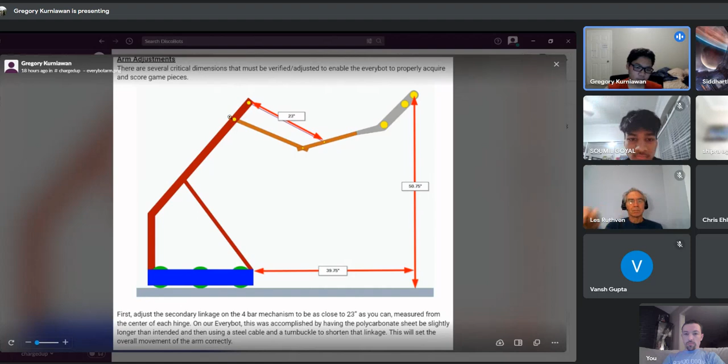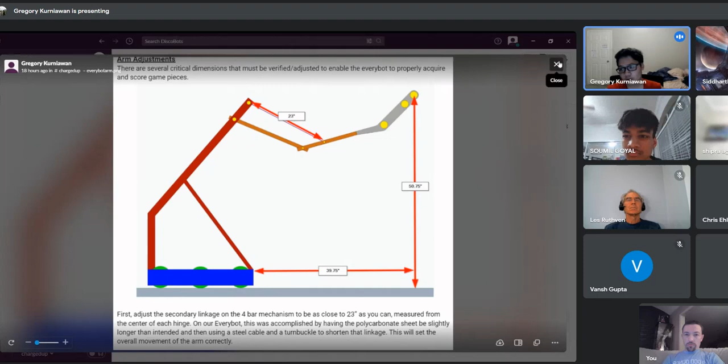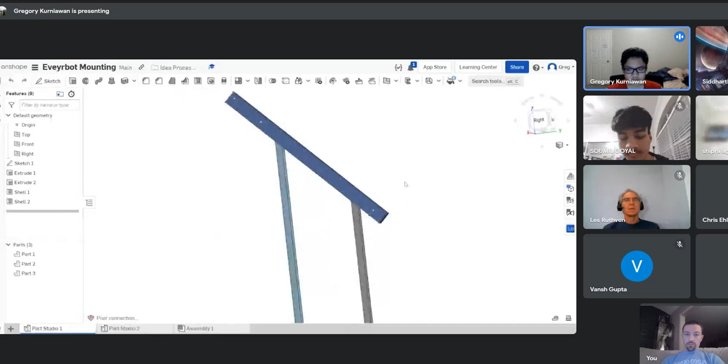I've made a concept by myself. So mine is we have two 1x1s, and then this 2x1 here, and the idea is, because of the lack of availability for the 120-degree gussets, I've tried to use the 135-degree gussets. Hopefully those are in stock.

Yeah, some of the things I noticed about the EveryBot was because of the top hinge, they need a shaft at the back, and a chain running to the main hinge, and because of that, that increases a lot of weight and a bit of complexity.

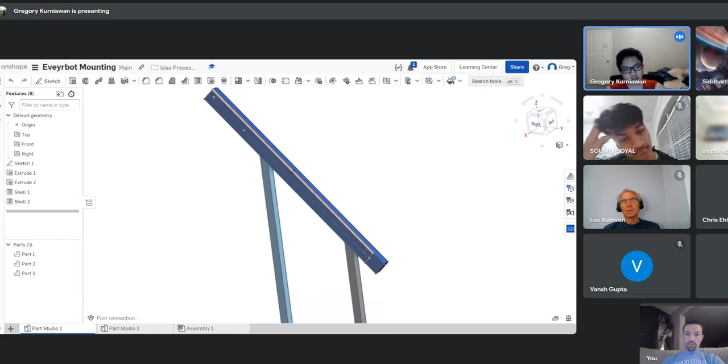So next step I'm going to try is to move this top hinge down, and see how that will affect some of the movements of the arm. And if I can do that, we can make a shaft here, and hopefully it'll be a lot simpler.

Yeah, in terms of 120-degree gussets, I think we do have some, and we ordered some. But if we really get in a bind, we can always make gussets, so keep that in mind.

We have the ability to do certain gussets, and I know you guys already have some custom gussets that you are projecting in the CAD. Those can be machined, it's just we got to make sure they work correctly and not waste time making really complex gussets if we don't have to. So anyway, that's just an aside. Anything else you want to talk about on this?

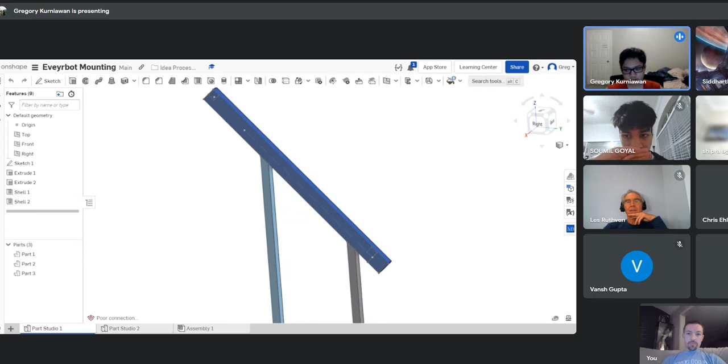Oh yeah, we'll be building the main structure of the main arm and intake piece for the Everybot arm at Westside in the coming weeks.

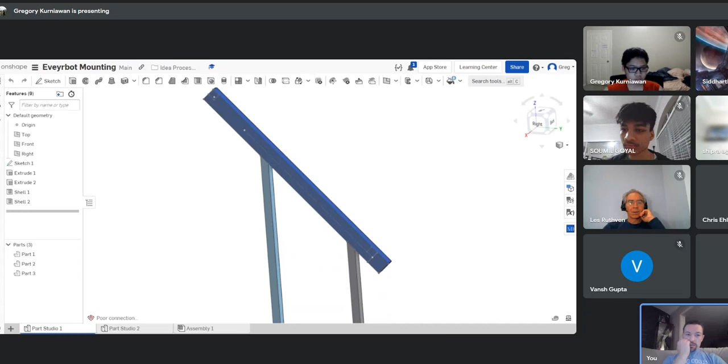Yeah, I have questions about the diagram that Sid threw up, and I think maybe you guys are working together on it. But this mounting scheme, I guess it's the one on Slack. If you want to just pull the one up in the CAD channel. I have the CAD pulled up. I can share that. Okay, let's just jump straight to that because I think this is very related, and it'd be helpful for everyone to understand it.

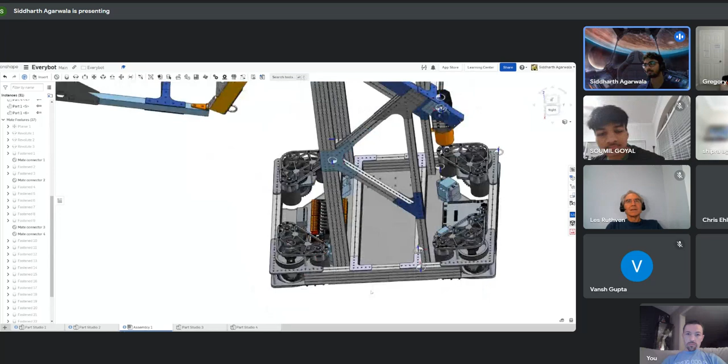So this was just like an expansion on Greg's one by one idea. I noticed that we had some more space on one side of the frame so that we could use a 2x1, which I thought, although it is a bit heavier by quite a bit actually, we could add more stability to the structure.

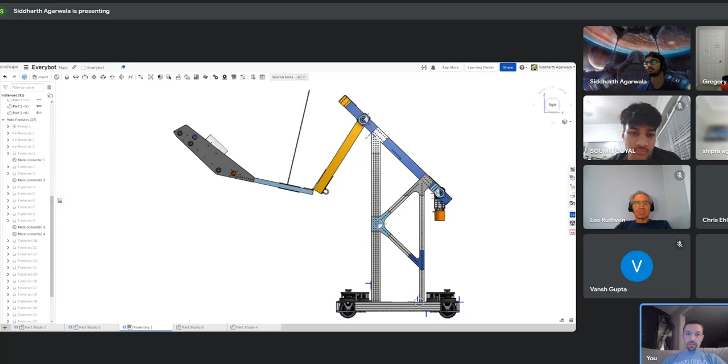If we go to the old Everybot, I believe they used the 2x1 also in their original design. It's just when they're using the 2x1, they use the 2x1 on the short side instead of the long side. So that's probably where it's looking like it's bigger. Yeah, there's just more 2x1.

Okay. All of the main dimensions should be almost the same. Like the pivot should be at basically the same height, but we just flipped the use of the 2x1 and the 1x1. Okay, and I see you've added...

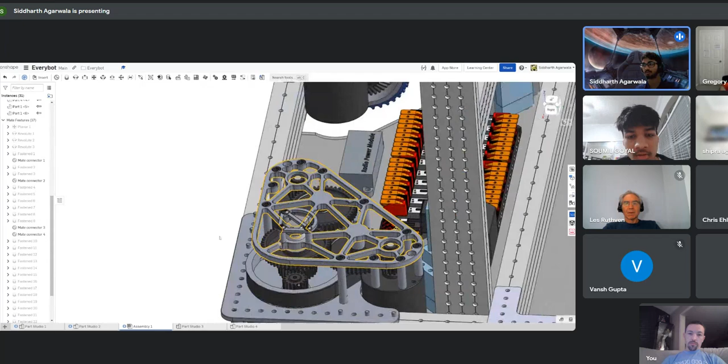So what's the benefit of this way over the original A-shaped design? Well, the original A-shaped design would require the arm to essentially clip into the swerve modules, and if you look at the Kitbot chassis, you have space where the swerve modules are on here.

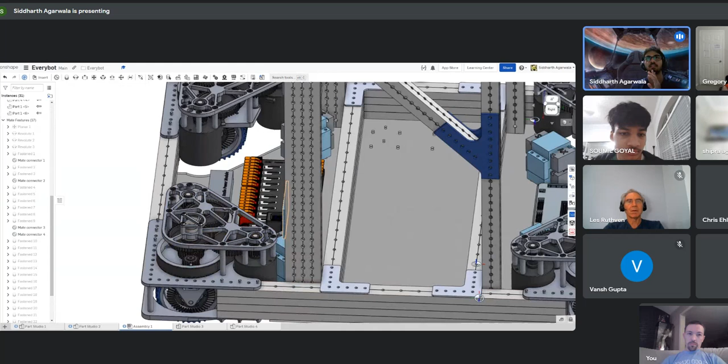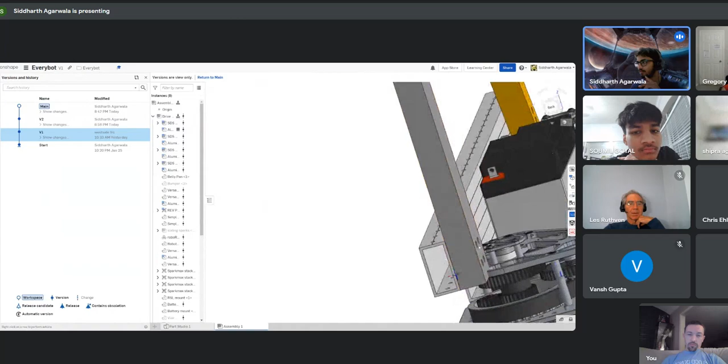Essentially, the problem was that it would require us to put stacked 2x1s. So I think I actually have a version with that in it. Yeah, here. So if we hide the bumper, you can see that they were like stacked 2x1s, and the 2x1 and the 1x1 were getting really, really close to the swerve module, like to the point where there was some clipping even.

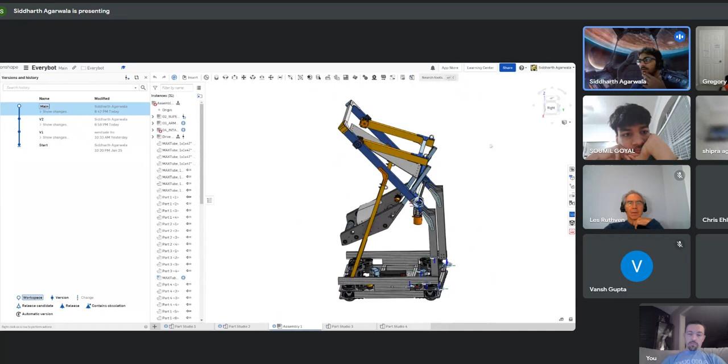And I mean, it's a strong superstructure. It could be optimized because we definitely have space to mess around with, like in the belly pan, which is when we come back to this. If you give it a second, it'll load up. Yeah, I see it now.

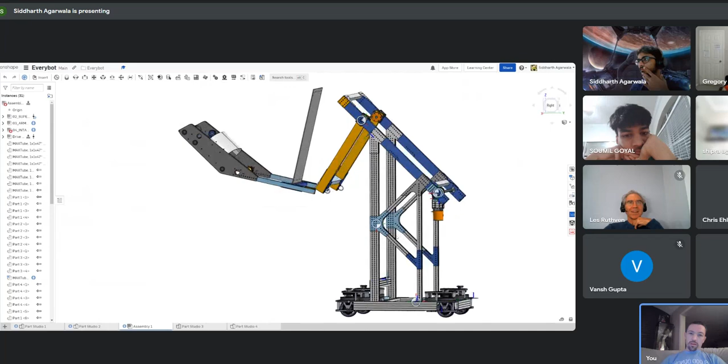So you swap the 1x1, the yellow 1x1, for a 2x1 that's going straight up. Okay, I get it. But you added some extra bracing here too, it looks like. Oh yeah, that's just to make sure it doesn't wobble, and I thought it looked nice.

It does look pretty solid with the triangles and stuff. Yeah, and just so everyone's aware, I don't know if people see it, but there's some custom gussets in there, which will take some machining.

It would be nice to think about how to minimize custom gussets if you're kind of designing your own webbing. So you probably could look at some of the Vex Pro angle gussets that we might already have that fit the right angles, since you get to kind of play with the angle. It just saves us a little bit of time of machining stuff. We could like laser cut them in something and then use them as templates too. So if we need to, just put a wood template.

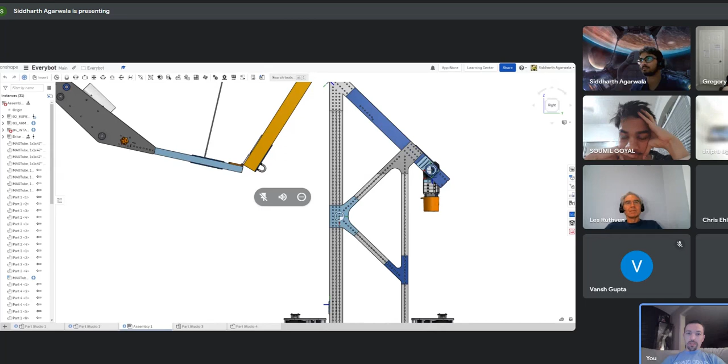Yeah, there's lots of ways we can make it. Just think about how to minimize the effort if necessary. Some of it is just not going to be possible because there's different angles that won't even match with what we can buy. I will say that all of these are at 45-degree angles together.

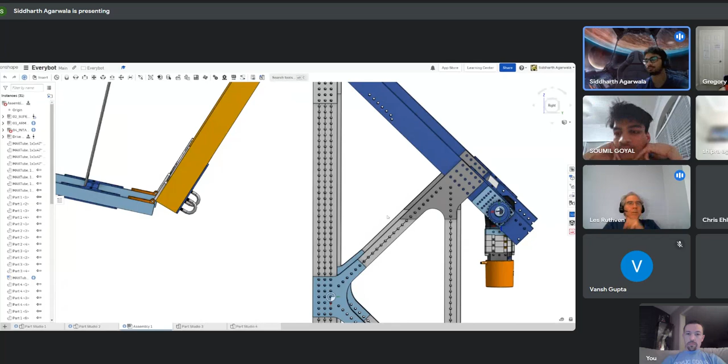Also, the gussets, I designed this for use with like Rev Spark tube, like Max Tube, just because it already has the holes drilled in the sides compared to VersaTube where you'd have to go and drill every hole. So that's the reasoning behind this. And then also this hole pattern on the gussets should coincide with Max Tube.

This last one I have to fix, but all of these gussets line up perfectly with the Max Tube hole pattern, which seems pretty solid.

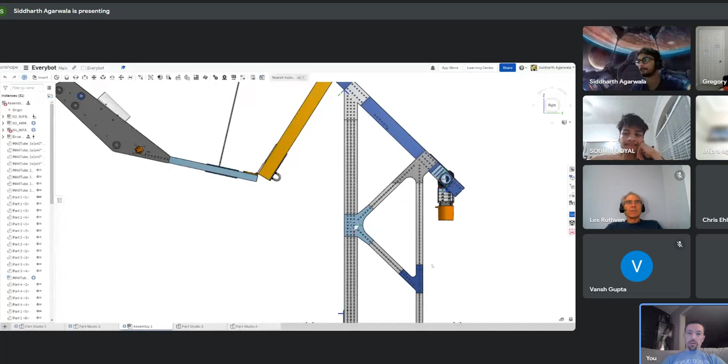In the rev order that I made, I have to check the dimensions, but I think they only had like 40 something inches available. I don't know if that's going to fit what we have here. I think 48 is the rev, they don't sell this 59. These are 42-inch ones, 59 inches or whatever. Yeah, 59 is Vex, but 48 is rev. So that's 42 right there. So we're good.

I'll check it. Yeah, I wouldn't get too hung up on the details right now. We can always massage those final designs.

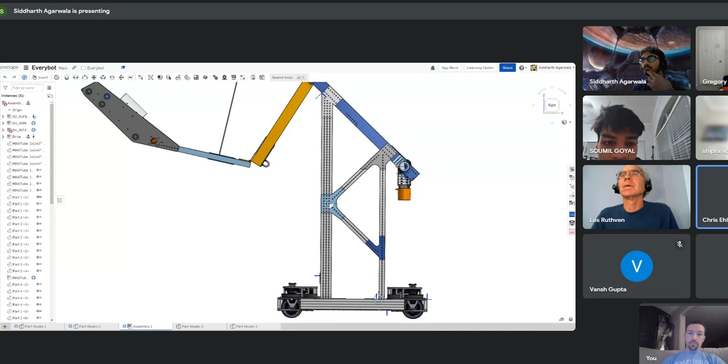The key thing I want to emphasize though is we got to make sure that geometry matches up with the EveryBot design. In particular, what I'm talking about is that blue beam that you've got at an angle right now. You have your pivot point locations. We need to make sure those match up with EveryBot, because if we start changing that geometry, it may not operate and function the same way that they've obviously already demonstrated.

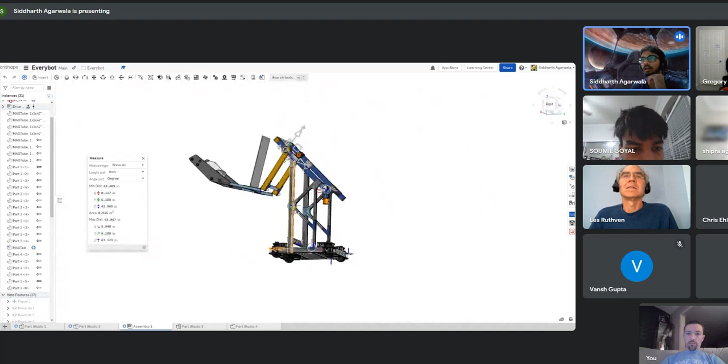The next thing I'd like to see is start throwing together Soumil's intake plates in here and try to get closer to most of the CAD roughly all together so we can see how it all looks.

That's the project for this week, I guess. Yeah, we always want to get as close as we can to a mostly complete CAD, so when we see conflicts, if we need to change something before we start cutting too much stuff, it would save us a lot of time.

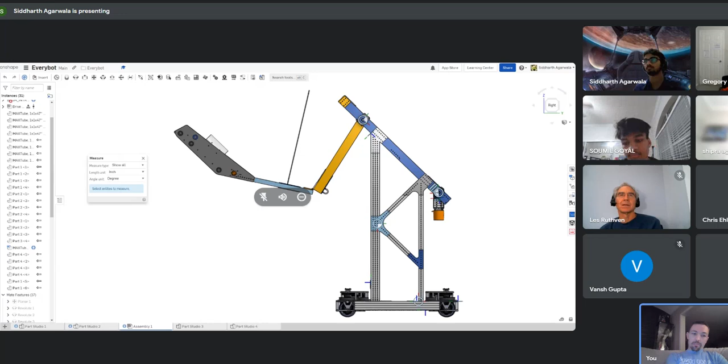Gregory can get hung up a little bit on the details of this mounting scheme to verify everything, and maybe you can move on to just making sure the whole CAD is going all the way. Sure thing.

So, Soumil, are you ready? Yes, sir, I'm ready. Let me know if it's shown. Can you see the fusion?

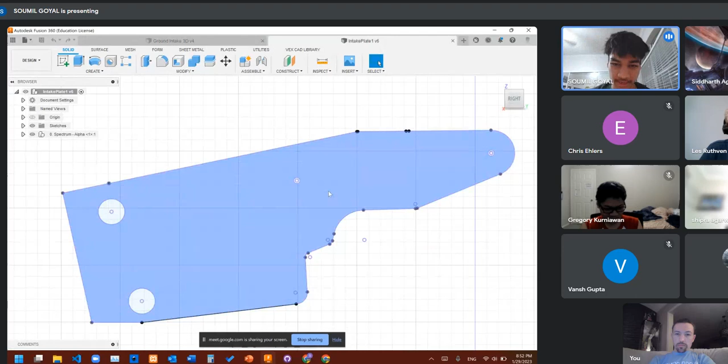Yes, excellent. I'll be brief here. Last meeting I presented some intake data from other teams and our own testing. Now this Saturday, we were able to simplify with further research into this type of plate that we laser cut. The main benefit over the last one is it's only like 2 holes, so it was easier to test with and prototype. If you're wondering how it will intake, basically between the 2 holes in this area is where the tip of the cone will go. So even if the cone is sideways, which we tested, if you run into it with the plate, eventually it will catch the tip of it, and the cone will always end up facing so that the tip of the cone is inside and the flange, the part of the square, is directly perpendicular outside.

And if you're wondering how it will take in the cube, no, it does not fit in the front. It will go in from the bottom.

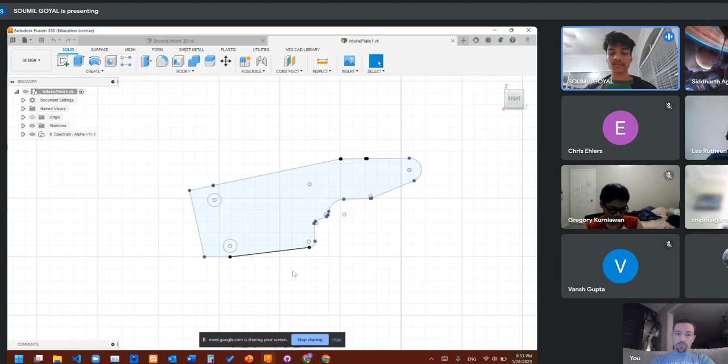So for some background of this design, it was heavily inspired by Team Spectrum's design. What they've done with this prototype is that, as I said, they take in the cones from the front, but the cubes, it actually goes underneath. So it uses the bumper as a wall, and then it uses this bottommost roller to assist with pushing the cube up, which is what I was able to test on the dummy swerve.

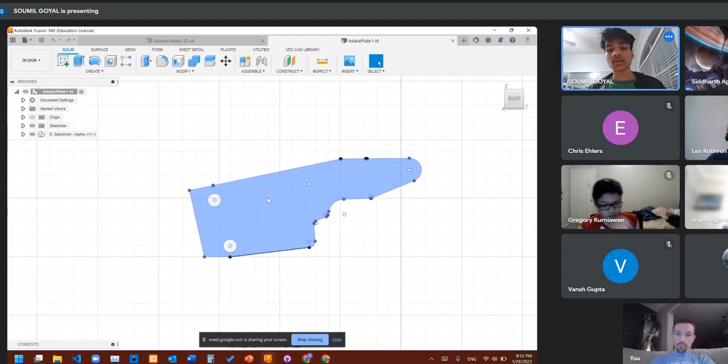And it did work. Now there's a few rooms for improvement. Firstly, of course, cone intaking can always be more efficient, but it's already pretty good right now. The main thing is about the cubes. What happens is that when you intake it, it kind of stays at the bumper level. And if it was ever a 4-bar linkage and you tried to retract it, it would actually drop the cube. But since it's a prototype, it will be easy to fix. One of the things might be just adding a 3rd roller somewhere in the middle so it can continue pushing that cube up.

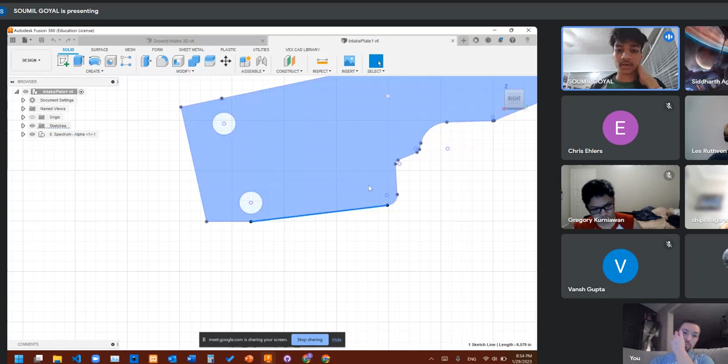Because currently it just gets stuck at the first roller since there's no other boost going to it. This curve represents the radius of the bumper, and that's how the linkage comes down. It starts inside the robot first. At position 1, it's all the way in within the frame perimeter. Position 2, it's only a little bit out and the bumper touches this curve so it can intake the cube. Position 3, it's all the way on the floor—this line is exactly rubbing on the floor right now, and that's how it intakes the cones.

Hopefully the next steps will be putting more geometry in the correct position so we can get the cubes fully up. My ideal thing would be that we don't actually need 3 different positions, and we can always intake cubes and cones regardless, in the same place. That's most of the updates for the ground intake.

But it did work very well. I know I made it sound a bit disappointing, but I think it was good results. I have a question.

After your position 2, when it hits the bumper, how will it go further down to the ground? Wouldn't position 2 be the final position?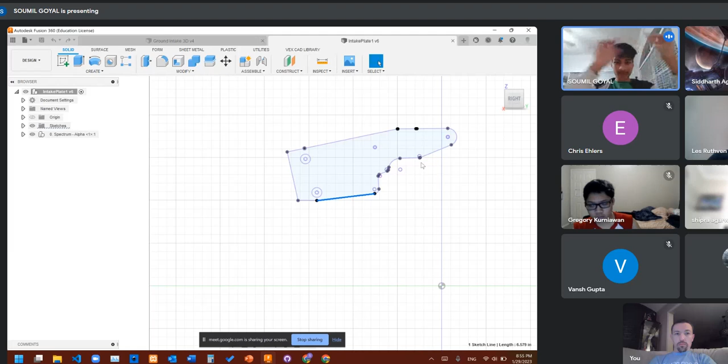Yeah, so the 4-bar linkage isn't parallel moving. If you imagine this is the intake as shown, right here on this hole there's one bar going down, and right here there's another one. This bar going down is much longer, so it actually moves in kind of an arc. As it goes on the bumper with this curve, as that bar keeps moving, it actually pushes the intake more out. That's also one of the rooms for improvement.

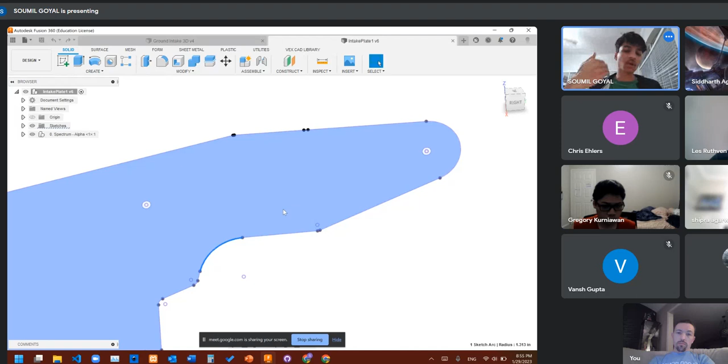Glad that you mentioned that. Also, one of the rooms for improvement is trying to get it as compact in the robot as possible, because currently, since this moves out in an arc shape, it sticks out quite far if it was on a real robot.

Eventually we need to take some of those prototype videos and share them so everybody can watch them over and over again and see how things are going. We don't have great videos yet of things picking up cubes, but I think we can get some more this week and really study it to make sure the prototype is working the way we expect.

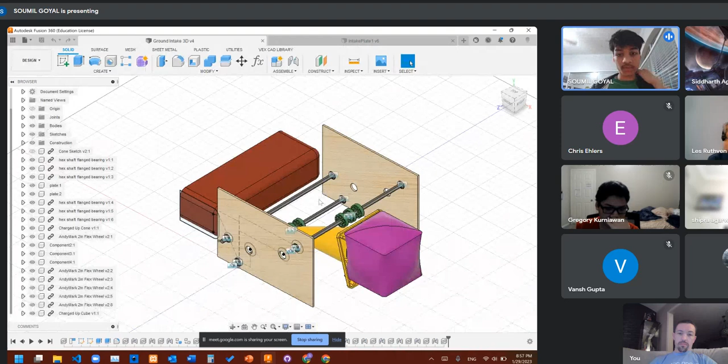I think they just had a smaller rod on the bottom, but kept the bigger wheel on top. Looking at their more recent videos, it's likely we might be able to make this, just have the cube go straight in between the two wheels. You might be pretty close, maybe half an inch off. But according to their CAD, the gap between just these two centers is 3 to 4 inches, and a cube is 9 inches wide. So it's definitely a different CAD they're using.

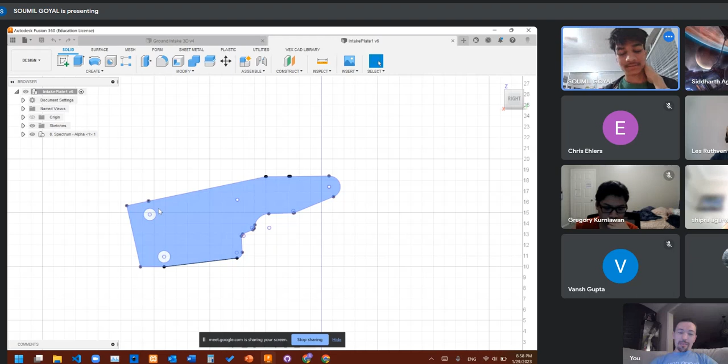Okay, yeah, I guess so. I just see it go on the video, so it's like, oh, that worked. Another thing to keep in mind is Spectrum posted that they've popped 4 or 5 cubes, so we probably should be a little careful since we don't have a lot of cubes. That's right.